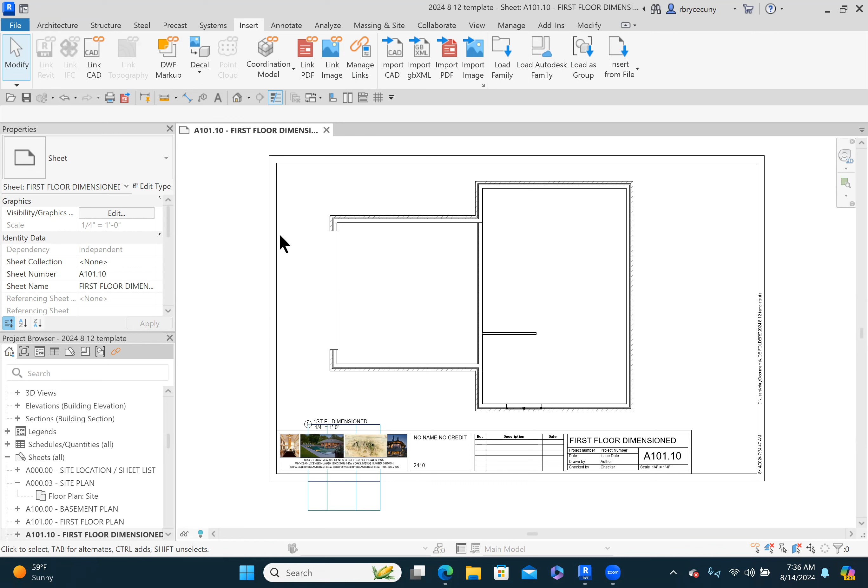We need to modify this floor plan so that it satisfies your design of a house. This is basically what I start with when I get a new project. I have many things already laid out, which makes Revit really simple for me, and it will be simple for you too.

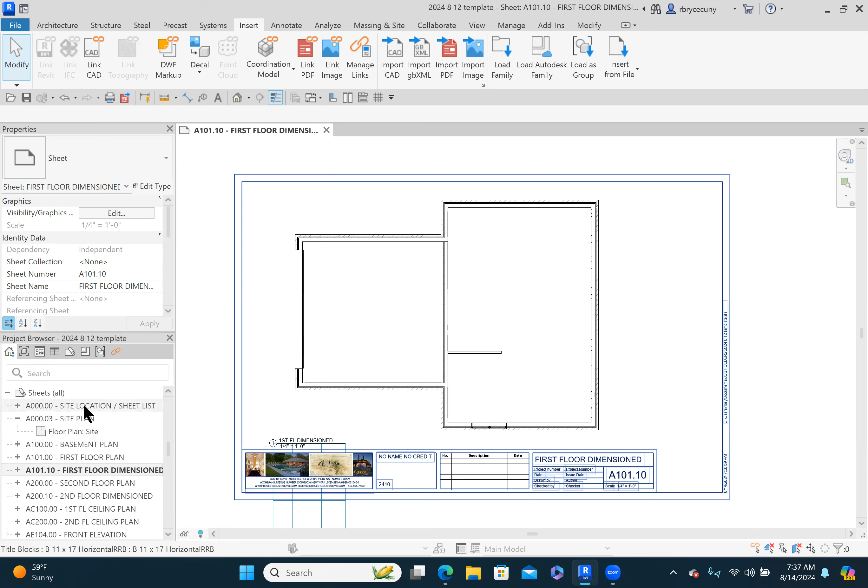So if we take a look, we scroll in the project browser. If you scroll down to your sheets, which are already pre-made for you, we start out with a site location list. I need you to go to Google Maps or someplace and find a location, an image of a location, and just click on this arrow and move that arrow to where you want the site to be.

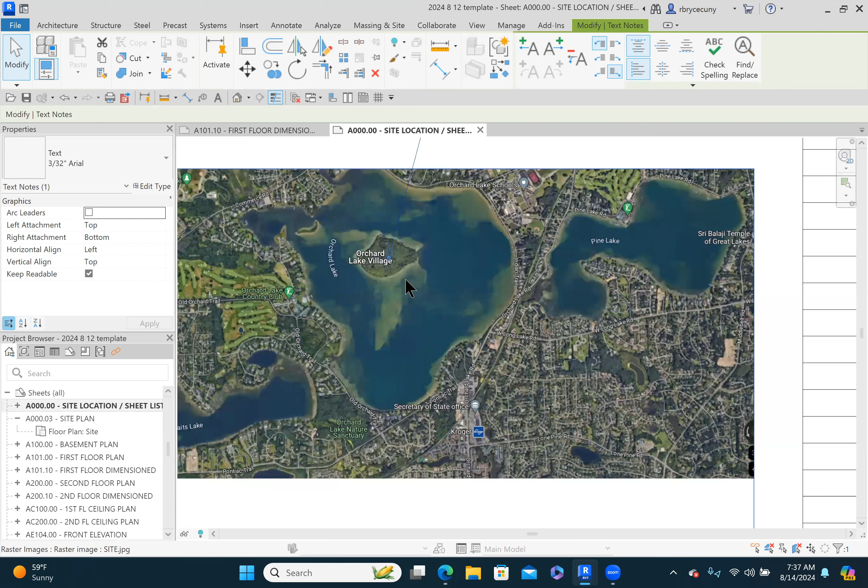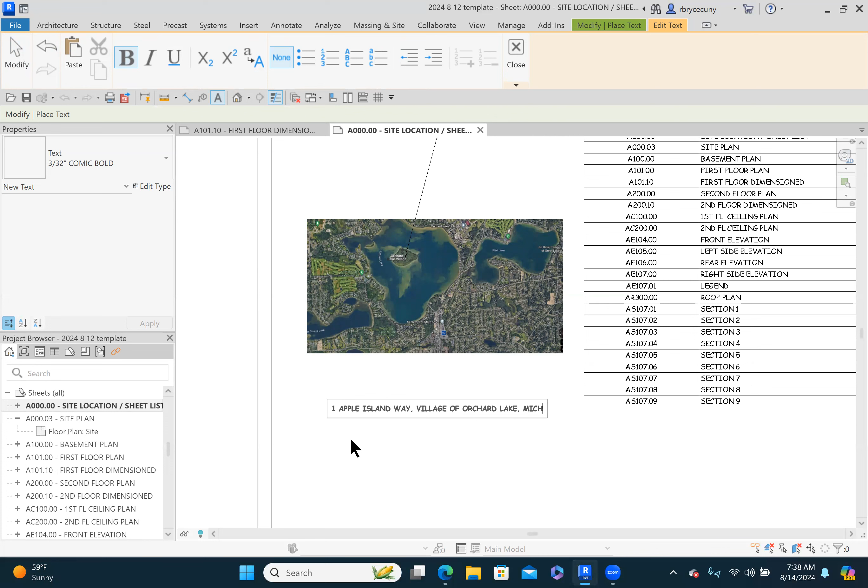I picked Apple Island, which is in my neighborhood. Down at the bottom we'll click the text icon and say, let's make some text. I was just checking to see if it's caps, and it is. So we'll call it One Apple Island Way. I believe that is in Orchard Lake Village, Michigan. You can make anything up you want.

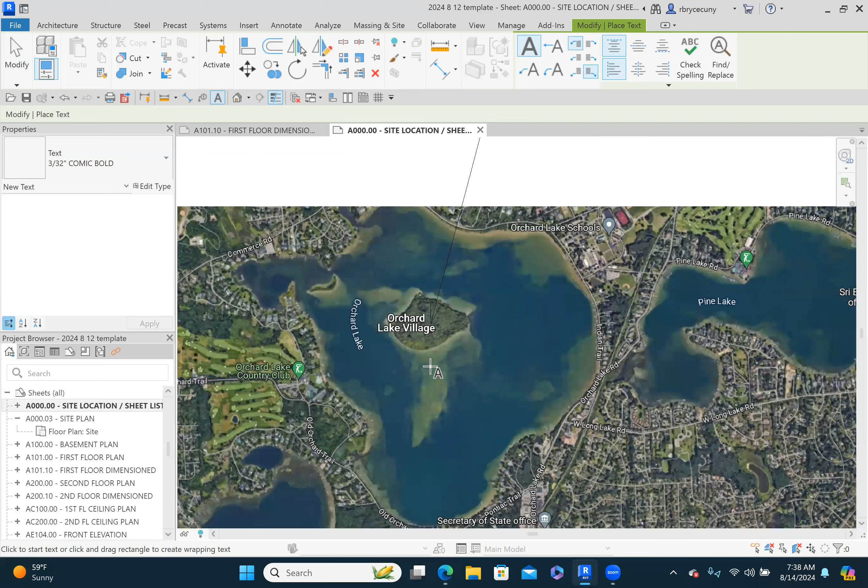This is private—well, no one lives on Apple Island. It couldn't get to it to begin with. But anyway, that's regardless, that has nothing to do with the class.

But pick a site, doesn't matter where you want this particular house to be located, because we want to locate it when we share our drawings. Typically, these drawings are going to be used for construction. We want the people to know where this particular house is to be built.

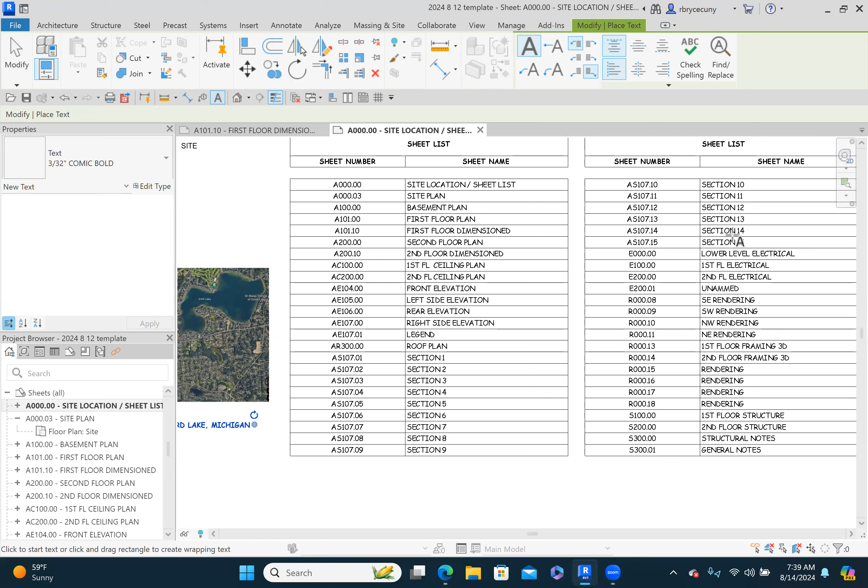And then also, if you look, you also have a table of contents. It's pre-built, and there are sheets for all of these items. But let's say when we actually do our project, we don't have 15 sections, we only have 14 sections. So we go down to section 15, click on it, and we'd say does not appear in sheet, and uncheck that.

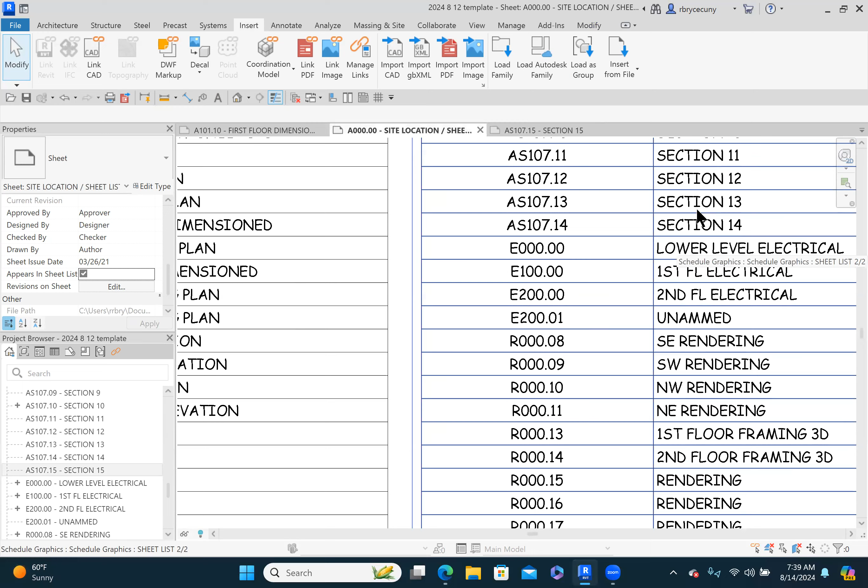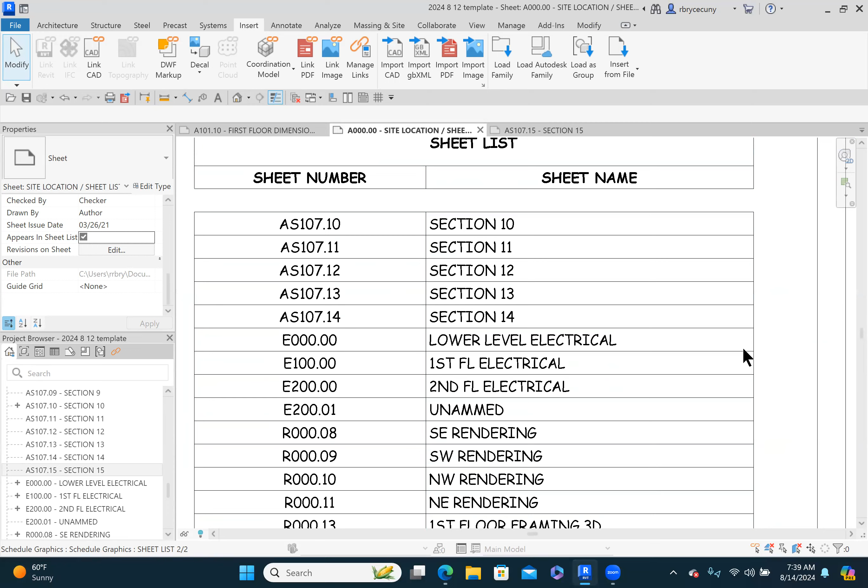Now if we go back to the sheet list, we'll see that it stops at 14, it doesn't go to 15. But for the purpose of this class, when I say it does apply, look—it added it back in there. Did it? Wait a minute, what happened here? Oh, because I'm on sheet 15, it's active, and I want it to appear in the sheet list, and there we go. Go back to the sheet list, and now it should be there.

Yeah, it is. So when you roll up your sleeves and start working in this class, you don't know how many sections you're going to need, and when I'm working on a project, I don't either. So I start out with 15 sheets that I have dedicated for the sections. As I populate those sections, when I'm finished with the project, I'll say, well, there is no section 15, 14, and 13, and I'll go and uncheck that so it does not appear in the sheet, which is in the property section of your navigation tools here.

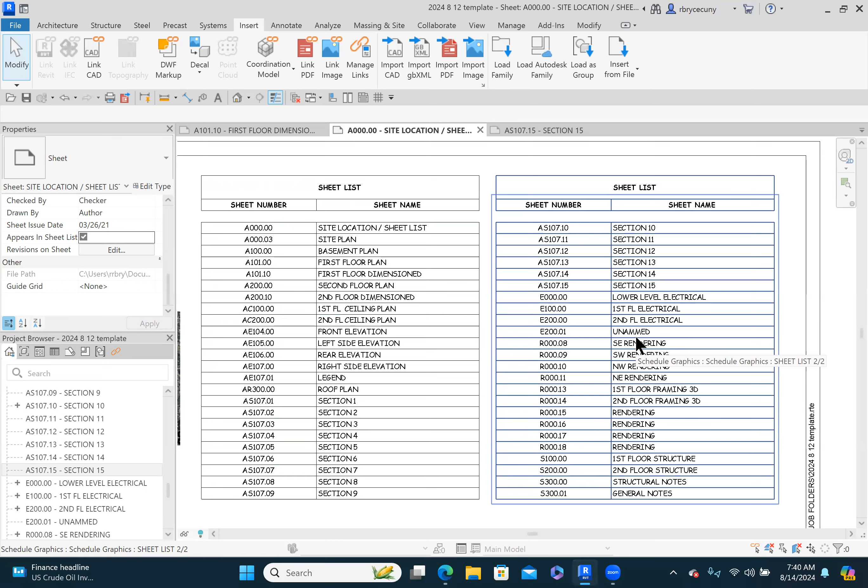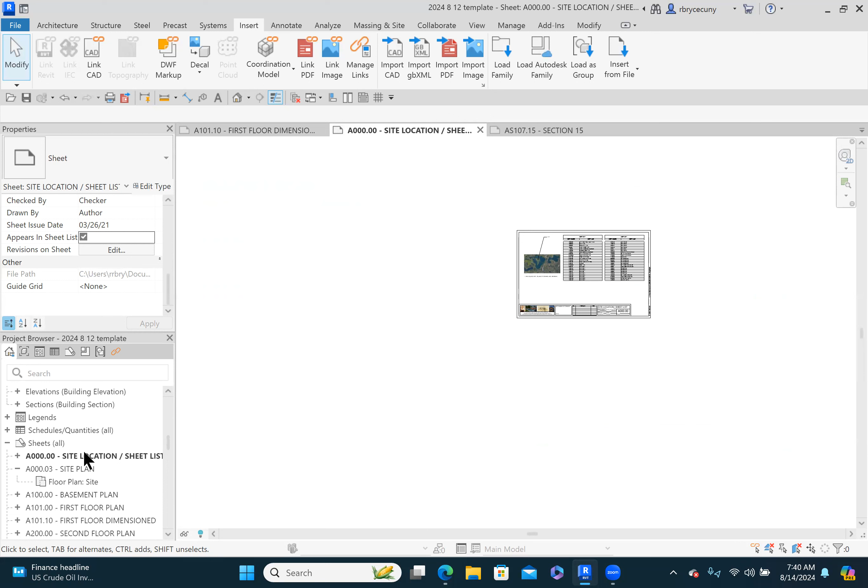Okay, so we don't want this—15, we would uncheck it. Again, you don't know at the beginning of the project how many sections you need to create for your project. So if we keep scrolling down in the sheets area, we looked at the site location.

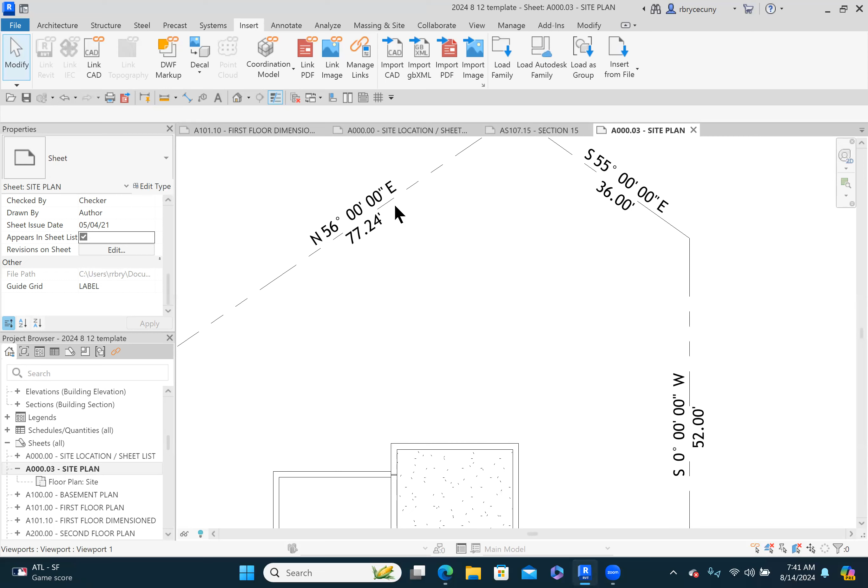Then we have to have a site plan, which I will also share with you how it is created. Each piece of property that we're going to put a project on—whether it's a school, an auditorium, a stadium, a church, a synagogue, some sort of a temple, a house—it's going to be located on a piece of property. That piece of property will be defined by the angle of the property line and the length of it. So this is telling me the angle of the property line, and this is the length. We'll work on that later on in the class.

We're just going through the sheets. Now you already start out here—I've given you a basement plan, and it's already loaded on a sheet. Now as you make this basement bigger to satisfy your design, we may have to modify it as far as its presentation.

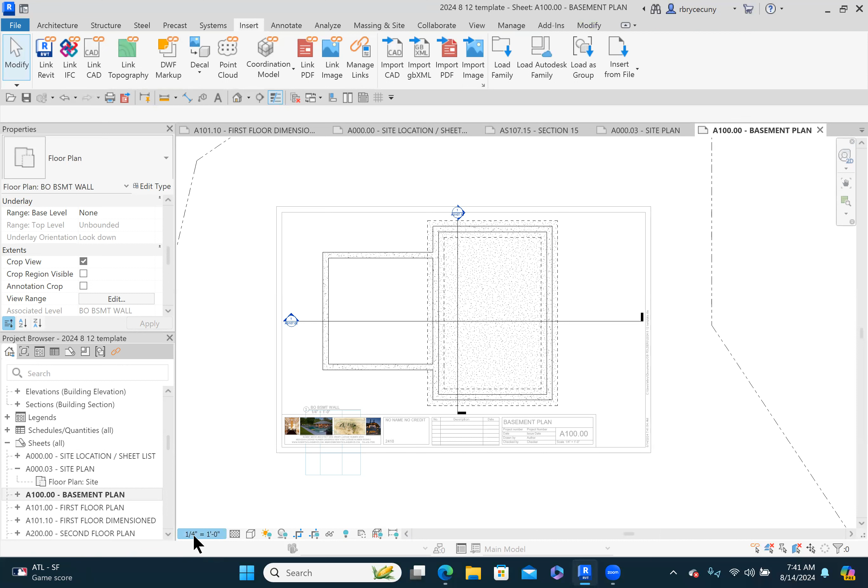So if this basement got larger, I would say activate the view—I right-clicked with my mouse, activate the view—and then I can change the scale from maybe a quarter inch. Right now it's a small house, it'll fit, but maybe I want it to be a little bit bigger house, so I might need to make the scale a little bit smaller. Now I can have a larger house if my house ended up being that big.

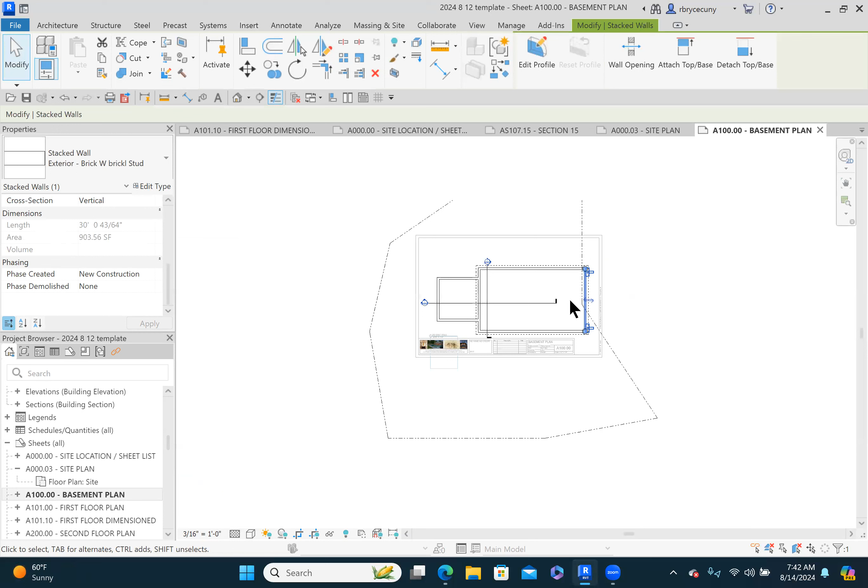It wouldn't have fit at this particular scale, which is, what is it now? 3/16. So let's go back and just look at if I made the scale a little bit bigger to 1/4, see how it doesn't fit on the sheet.

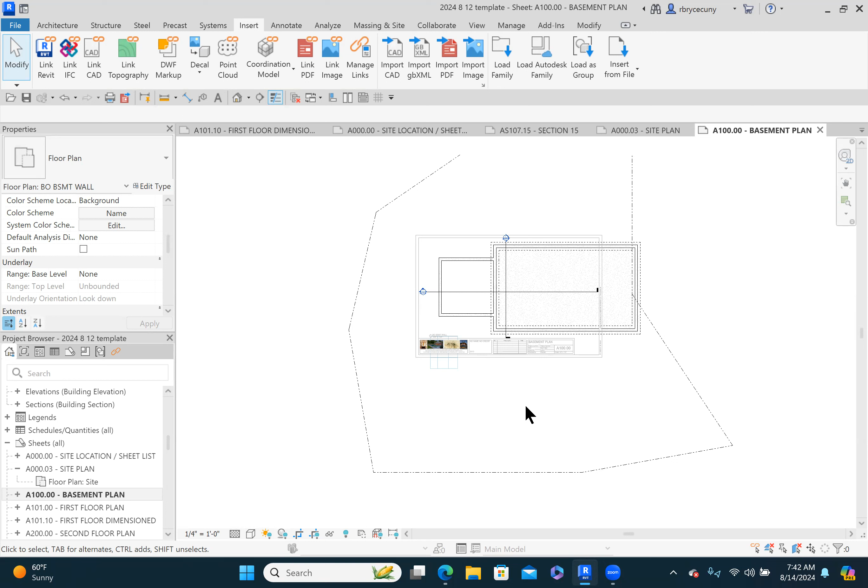Your project will be printed by the sheets, and if work doesn't fit on the sheet, I will only see what's on the sheet, and therefore I can't give credit for work done if it isn't displayed on the sheets. And if you think about that in real projects, if the people trying to construct your ideas that you've put on the paper can't see that, then they don't know what you want. They can't read our mind.

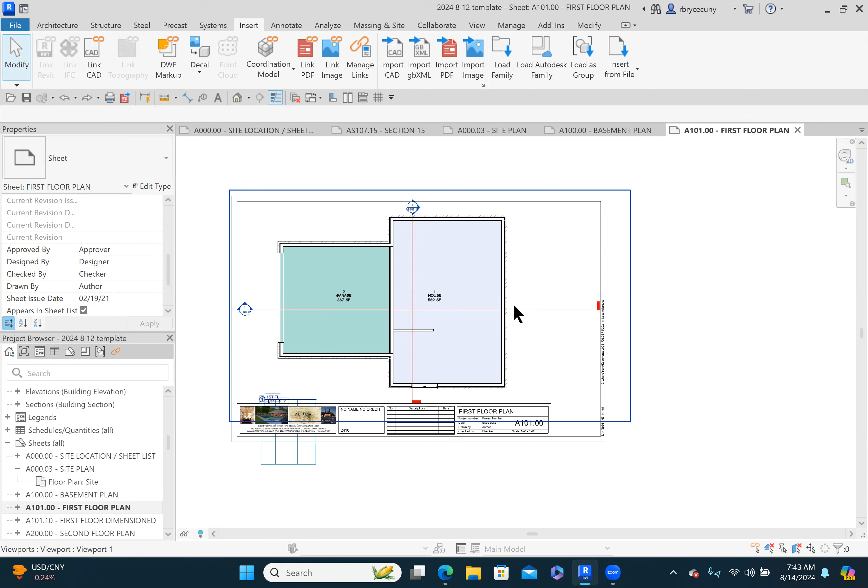So if we take a look now at the first floor plan, look what happened. The beauty of Revit is when I modified that floor plan, it actually changed the basement, the first floor, and the second floor automatically. I'm going to activate the view, click on this section and say go to view. And these are actually stacked walls, which means they are different wall components stacked together to create a wall.

So when I move this wall, let's do that. I'll go up to the ribbon. I'm in the modify tab of the ribbon. I go over to the move icon, which if you hover over with your mouse, Revit will tell you what it is. But anyway, let's grab this guy. I'll click on the object, say I want to move it, and let's move it to there.

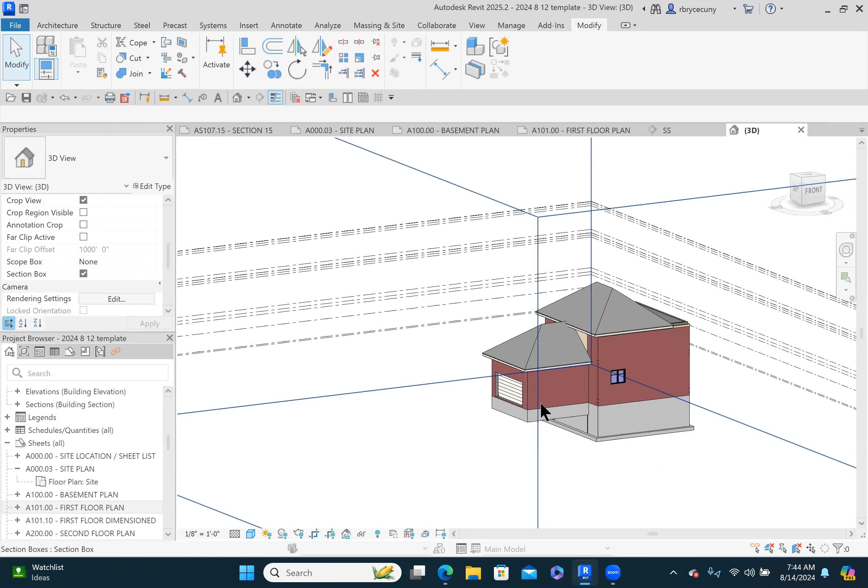Notice that it moved all of that wall, including the footings. It didn't move the roof because the roof isn't attached to the wall. But it did move everything on the basement, the first floor, and the second floor. If we take a look at that in 3D right now, just click on this little button here, and I'll spin it around, you can see that it actually moved that wall out, all of the components of that wall.

So I can take that wall, and I'm clicking the arrow key on my keyboard, and look what happens in Revit. It's moving that wall and its connections to the other two walls that it's connected to.

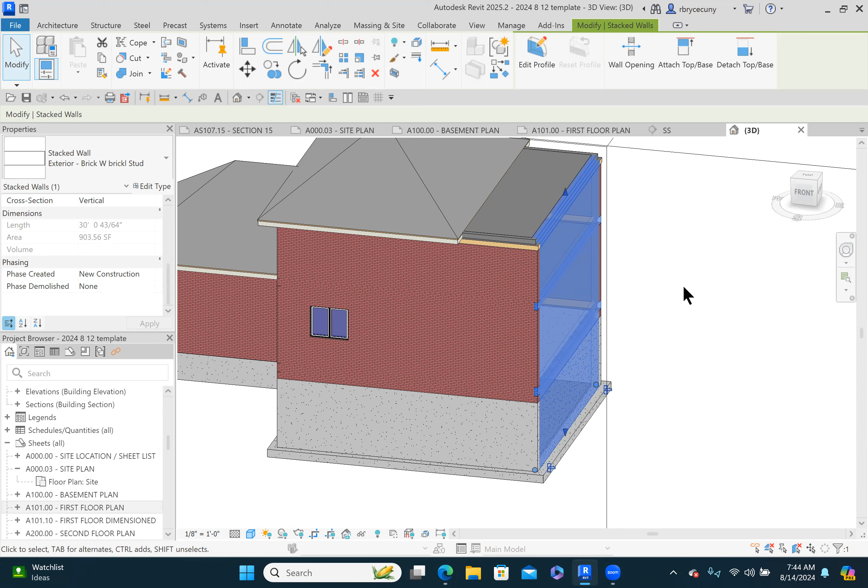So there's a lot of features that I think make Revit a much more useful tool than AutoCAD, which is a prerequisite for this course. So you've taken AutoCAD, now you can see if you were going to do this in AutoCAD, you'd have to move this wall, this wall, and this wall individually. But in Revit, it moves it automatically.

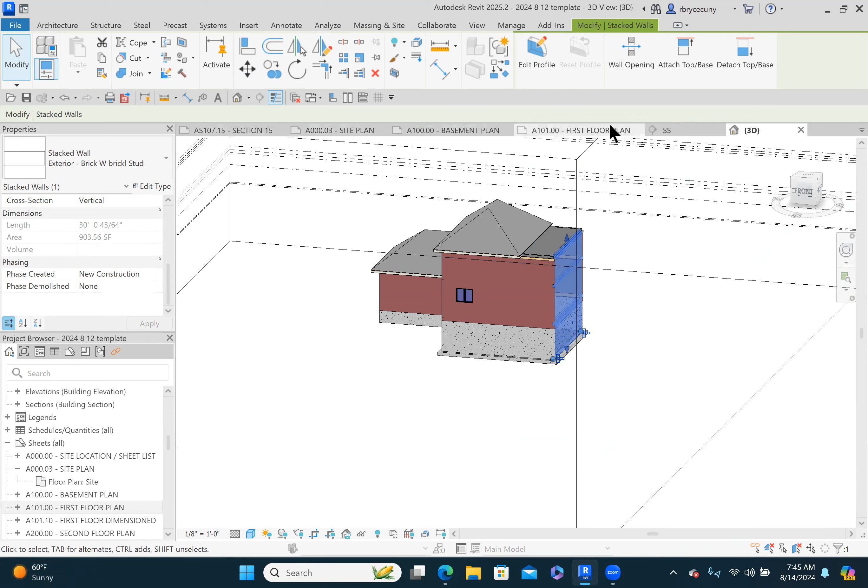So I'm putting up a lot of tabs up here. To close those tabs, just click on the X. We're back to that section. I can leave it where it is now. We're just going through the sheets.

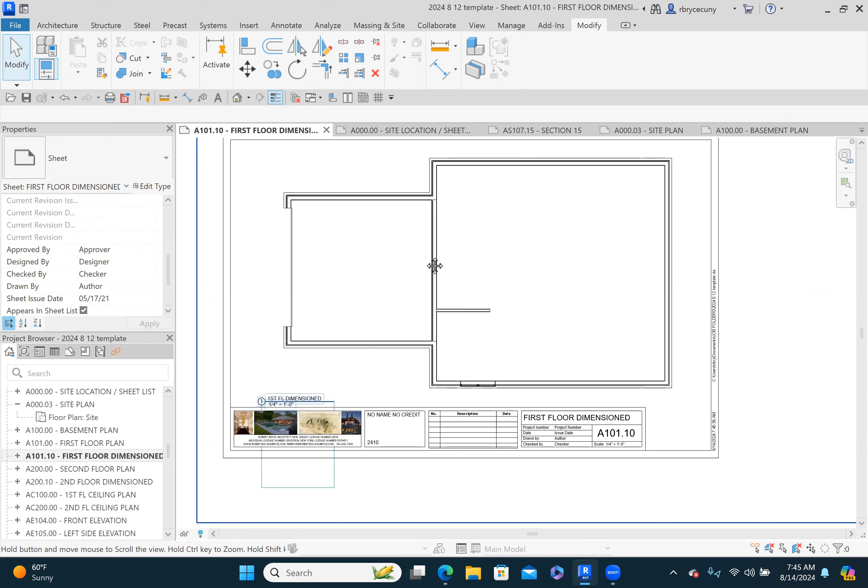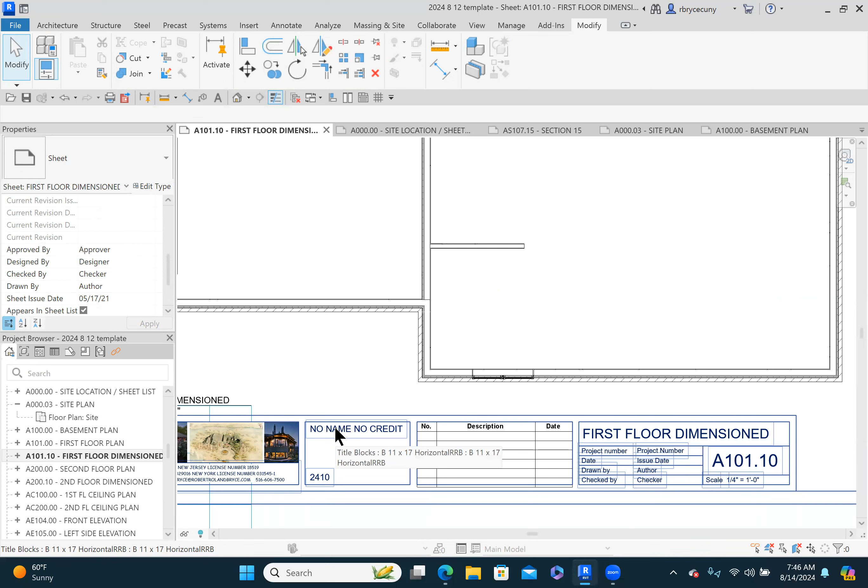So we have the first floor dimensioned, and that's one of the requirements in this class. Today we're going to do a couple of things, assuming you're watching this after the class. The first thing I want to tell you is we're going to submit drawings every week. You get 2 points for just submitting, whether you've done any work or not. That adds up to quite a bit of points for your total score. But if you don't have your name on that sheet, you're not going to receive credit for your submission. So the first thing we want to do is double click on that with your mouse and just put your name.

Now, what happened to the other sheets? It changed, Revit changed that on every sheet. So when you just click on one and fix it, you'll find that it changes it on every sheet, so you don't have to go through sheet by sheet.

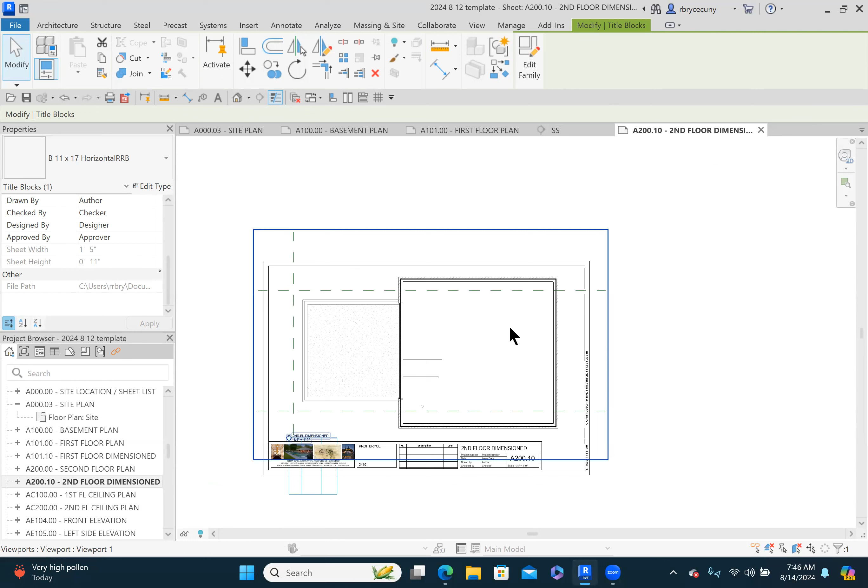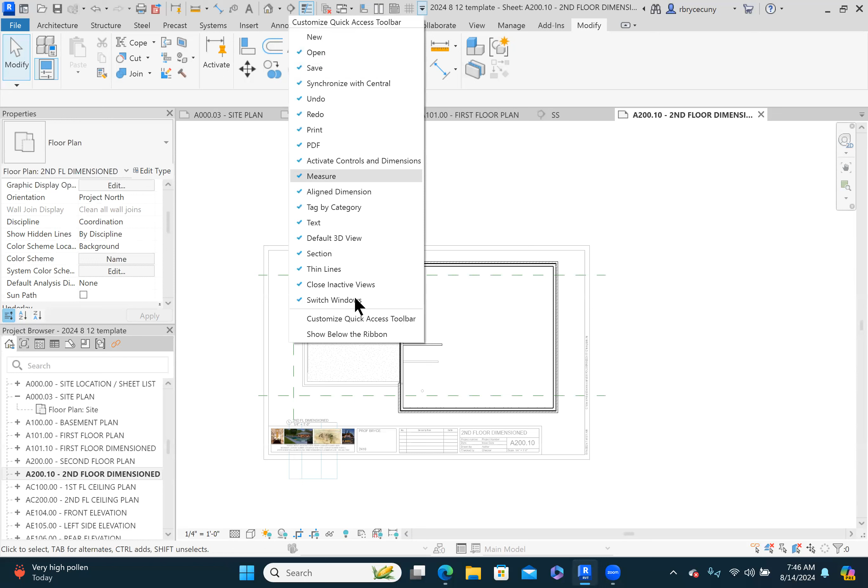But what is important here in the class is that I'm going to right-click on top of the drawing, activate the view, and go up to the quick access toolbar, which when you start may be at the top of the ribbon. If I click that, it moves it up to the top, but there's this little down arrow, click on that, show below the ribbon, because I like it that way, this is my preference. So if you want it to stay at the top, that's fine. You're working on this template, so it's probably going to come to you with the ribbon down below.

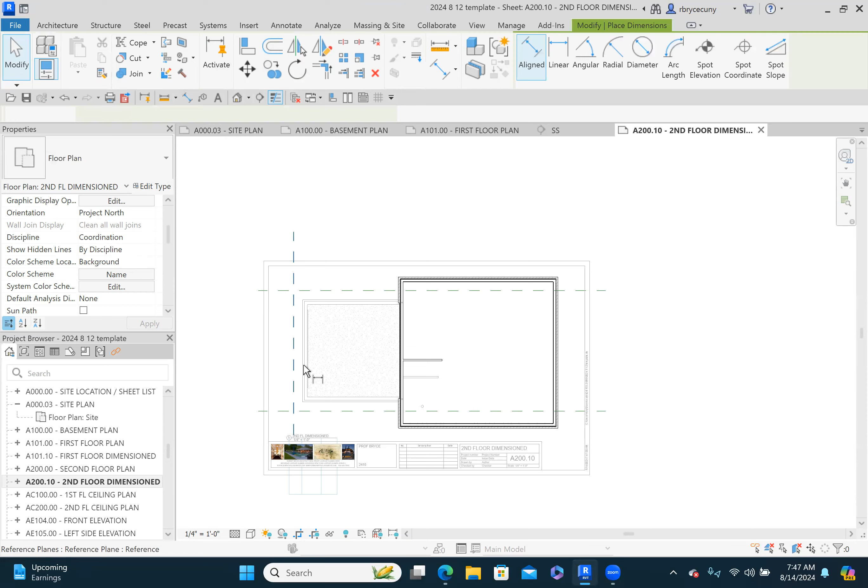Anyway, I want to put a dimension in. You can see this icon here. All I have to do is click on it and then show Revit where I want it to dimension to. I've selected the places I want it dimensioned to, and now I just have to click where there's no object, because now I'm trying to place it.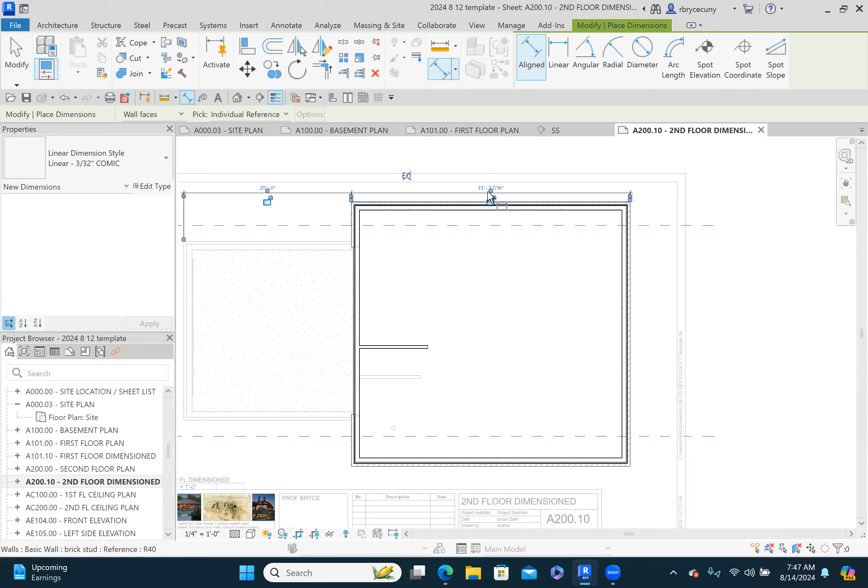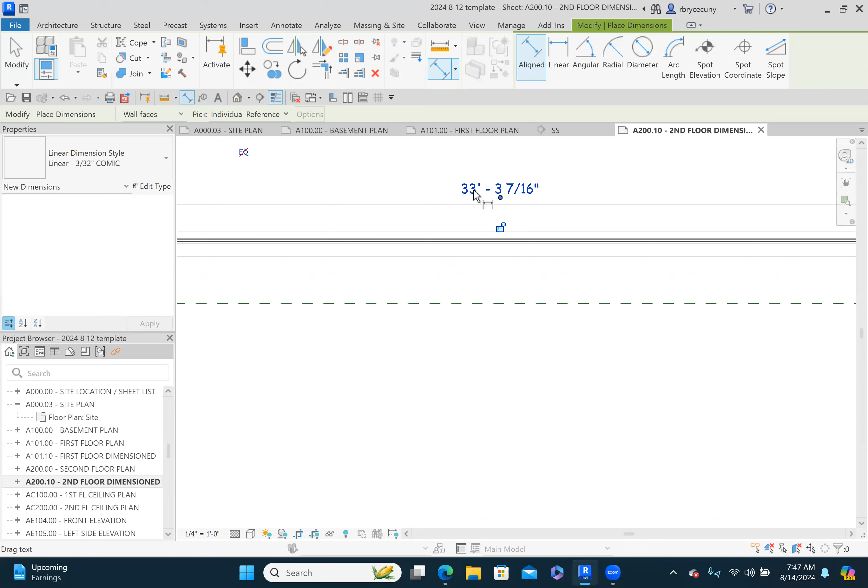So I don't want to click on an object, because if I clicked on an object, Revit would think I'm dimensioning to that object. So I'll just click right here to place the dimension. As you can see, this is a strange dimension, and I don't want it to be that. The requirements in the class are that dimensions are 2-inch increments. So this dimension could be any foot distance, but then this would have to be 2, 4, 6, 8, 10, or 0 inches. It has to be an even number. So how do we do that?

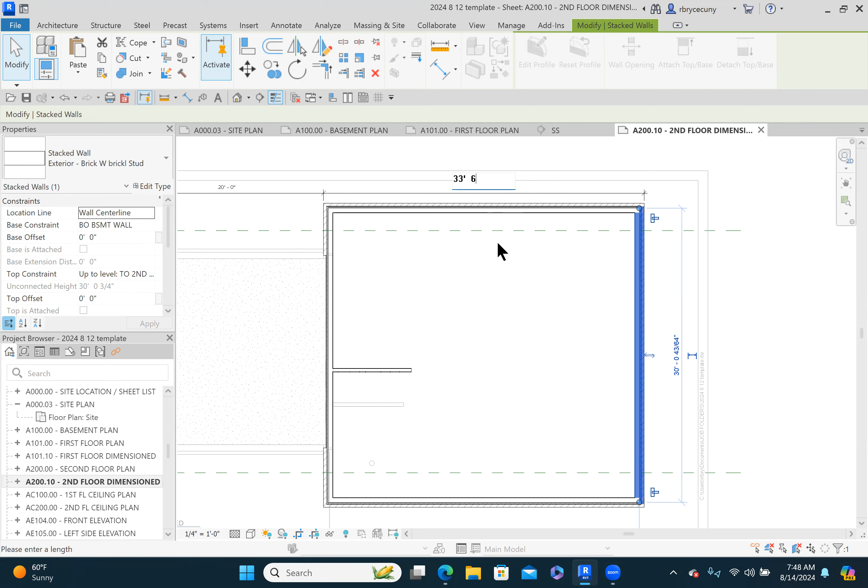Well, let's hit escape a couple of times. Click on the object you want to move. We want to click on this dimension and tell it what we want this dimension to be, and Revit will change that dimension by moving the object you have highlighted. Now, it's not active, so I'm going to go up to the ribbon and say activate. Now when I click on this dimension, I'm going to say 6 inches, hit enter, and watch what happens. It's going to move this wall to satisfy that dimension of 33 foot 6. If I wanted it to be 33 foot 0, I would just say 0. That's an acceptable incremental dimension, and it moved that wall to satisfy that dimension.

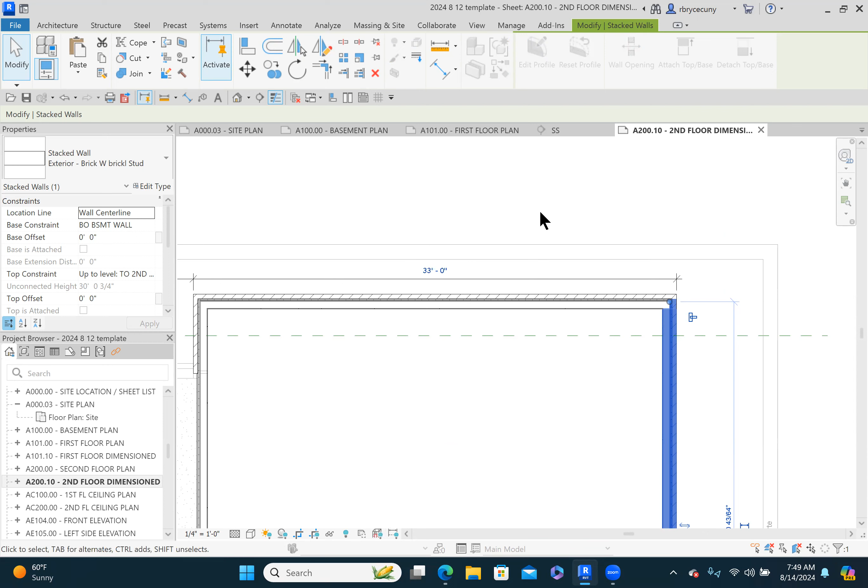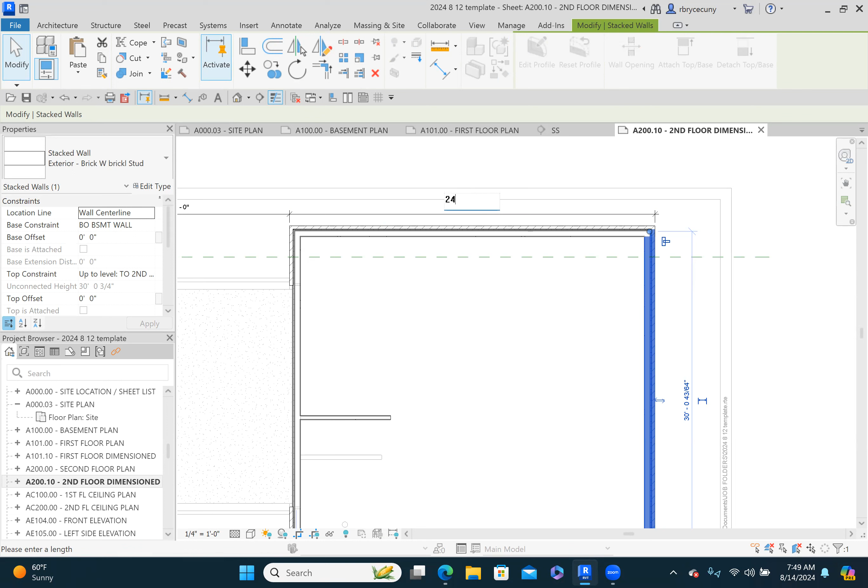So in order to change your dimensions, a lot of people will think you just click on this dimension and that will allow the dimension to change. But if we just click on this dimension, Revit doesn't know: do I want it to move this object to satisfy the new dimension, or do I want it to move that object? So the first thing we do is click on the object that we want Revit to move, and then we change the dimension. So maybe I wanted it to be 24 feet. Watch what happens. It makes it 24 feet by moving the highlighted object, because Revit wouldn't know otherwise.

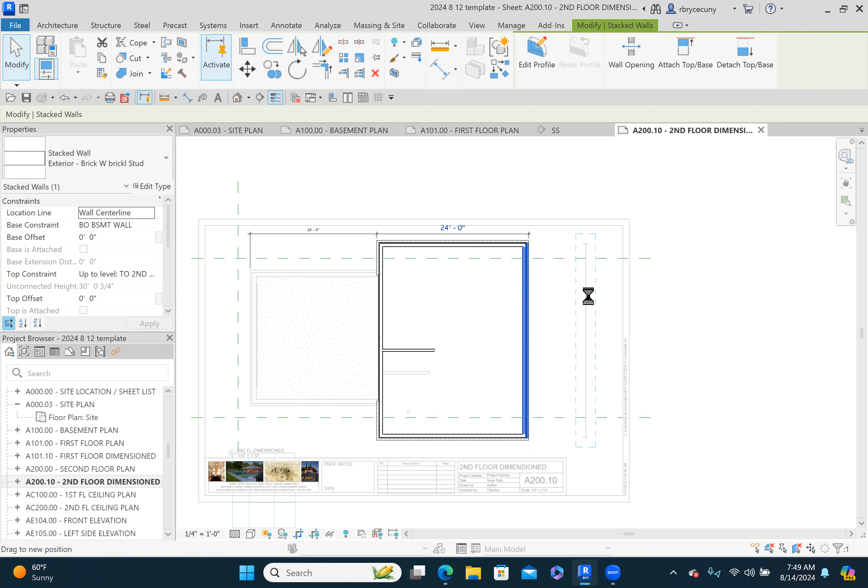So as we start to lay out the inside of the house, we'll find that, well, wait a minute, I don't have enough house, I need more space. So you can grab this guy and move it over to give you more space inside of the house. But remember that you need to change this to an even dimension at some point in time after you've put the pieces inside of your house.

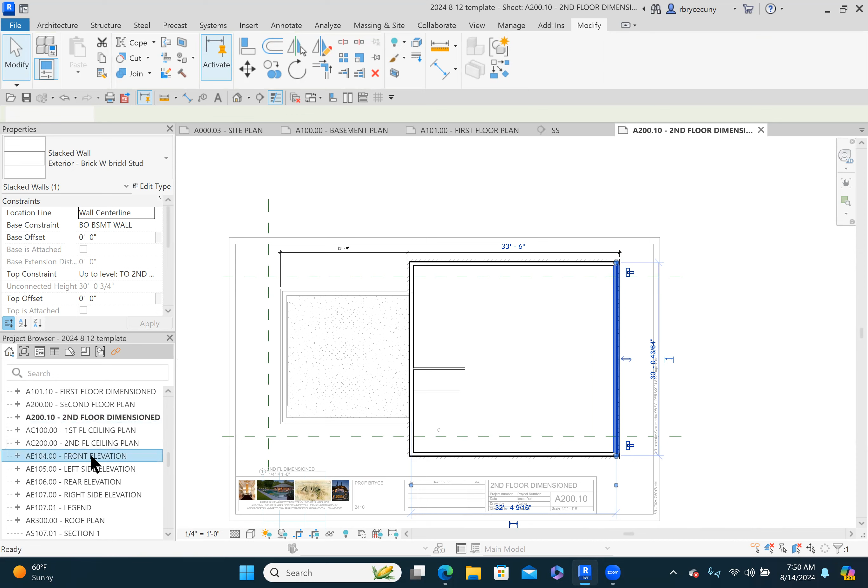Midterm will be making stacked walls. So I'm making stacked walls for you now, providing pre-created stacked walls so that you can jump right in, roll your sleeves up, and start designing your house. Later on, we'll work on how you actually make stacked walls, and that will be the midterm. I'll give you some stacked walls to make, and you'll have 3 hours and 20 minutes to make them.

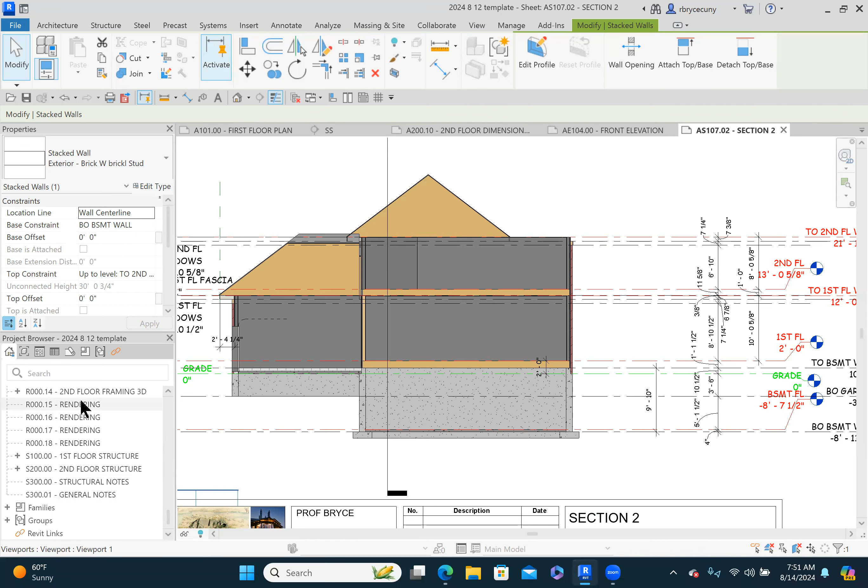So we have all kinds of sections. And then Revit makes nice renderings for us. But I didn't put one in here yet, so I haven't made one. It also automatically has some pre-made renderings that aren't really photorealistic - these are just more basic.

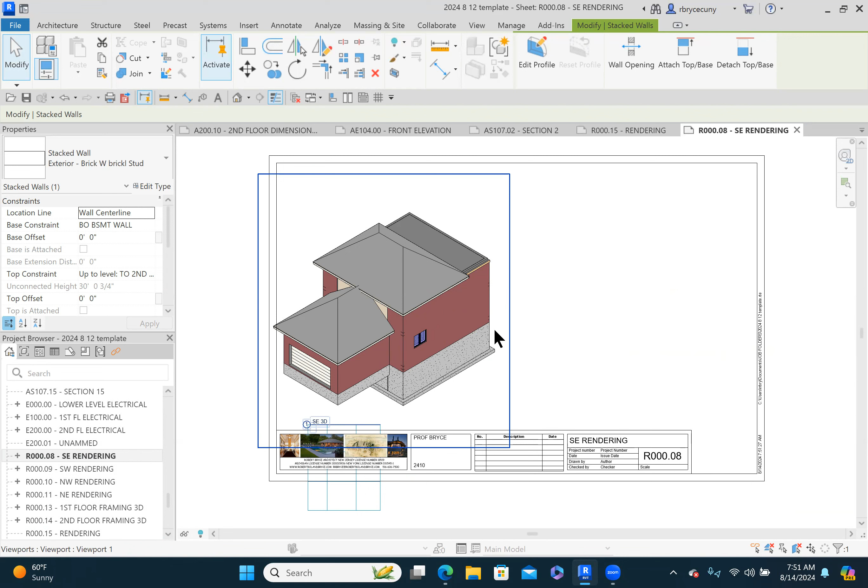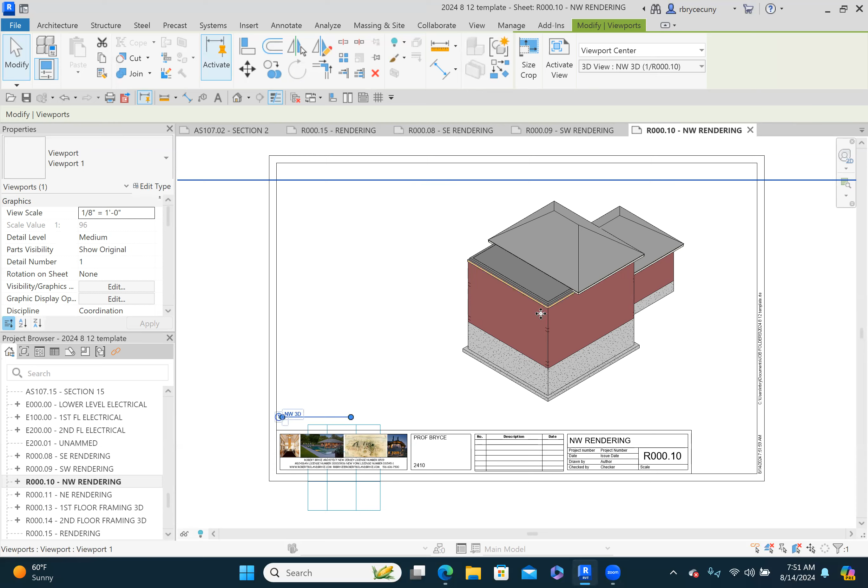But as you change the design of your house, these renderings will automatically change, and you might need to relocate them on the page by simply clicking on it. Then I find the easiest way to move them is to nudge them with the arrow keys if I want it to go up or down. As you modify your house, you're certainly going to have to do that as well.

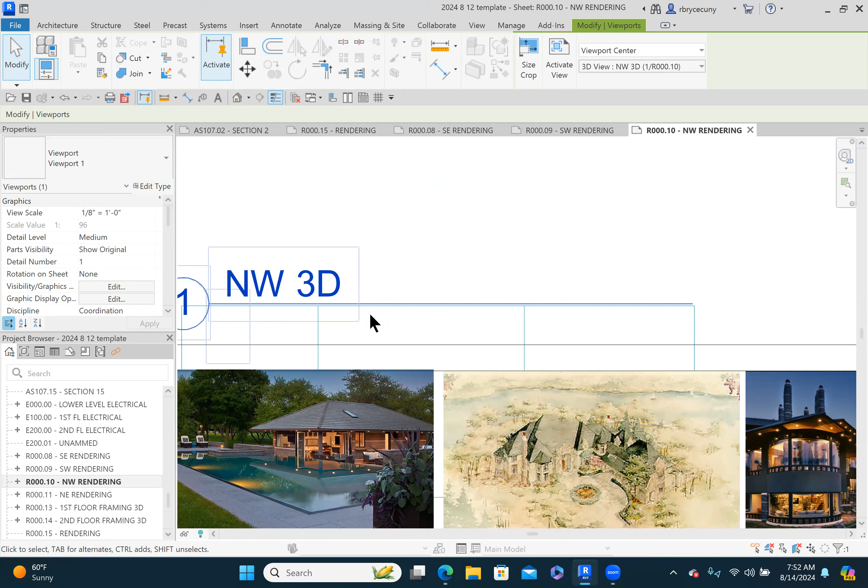We can talk about the grid guides, but I moved the house, so now I have to move the label. I've got a grid guide in there for the label, so I want that label - using the arrow keys again on the keyboard - to nudge it down close to that level. But we'll talk about that later. Right now, ZE on the keyboard zooms extents.

Here's your, or my, house layout, and we'll improve our architectural design over the course of the class.

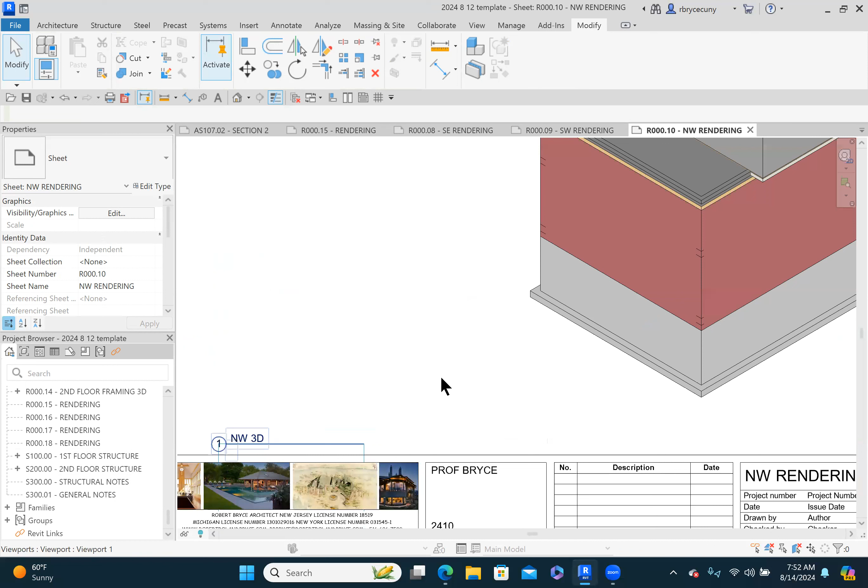But what I wanted to point out today is to make sure that you start out by changing your name down here to whatever your name is, so you'll get credit for it. And then we want to be able to print this and submit it on Brightspace.

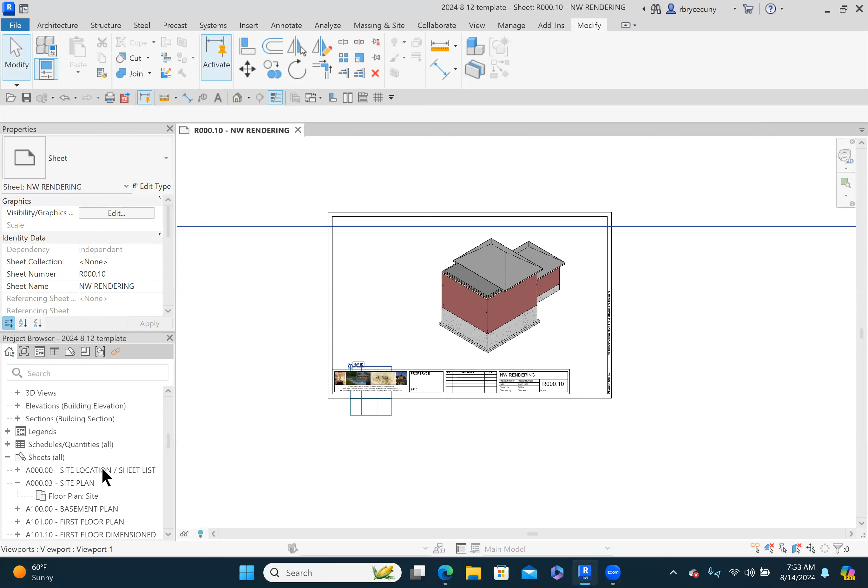So to print your whole sheet set, let's get rid of all of these tabs. There's a little red X in your quick access toolbar which says close the inactive. So, boom, all of those tabs were closed. This is the active view, so it stayed active, but we want to go over to the site location sheet list.

Those are the sheets that I want to print, and those are the sheets that you'll want to print. Whether you've changed anything or there is information on there or not is irrelevant at this point. I want to make sure that you print every single sheet.

So we'll go over to the file button and say print. What are we going to print? Well, we're going to print a PDF, so we need to pick the PDF printer. Let's see what's available here.

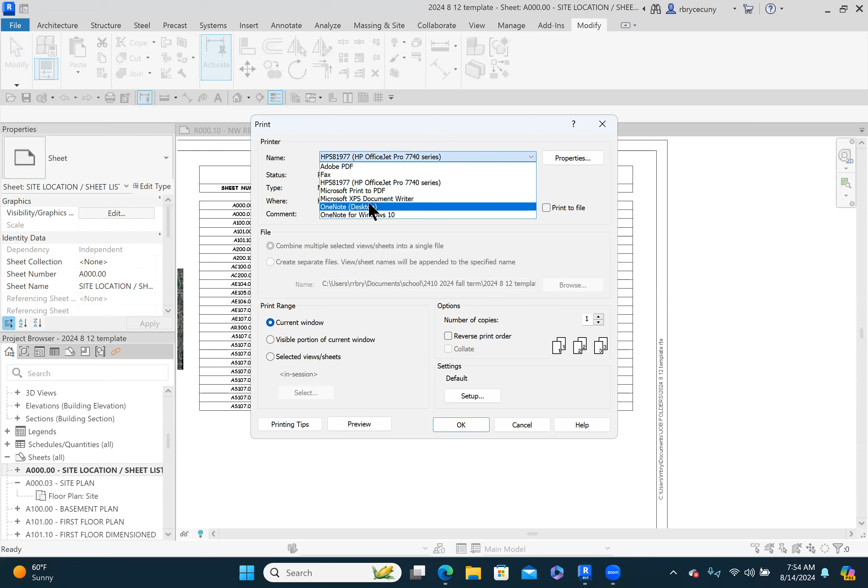I like Microsoft Print to PDF. If you have Adobe, I find that Adobe takes a lot longer to print, so I like to use Microsoft Print to PDF. Then we have to set it up.

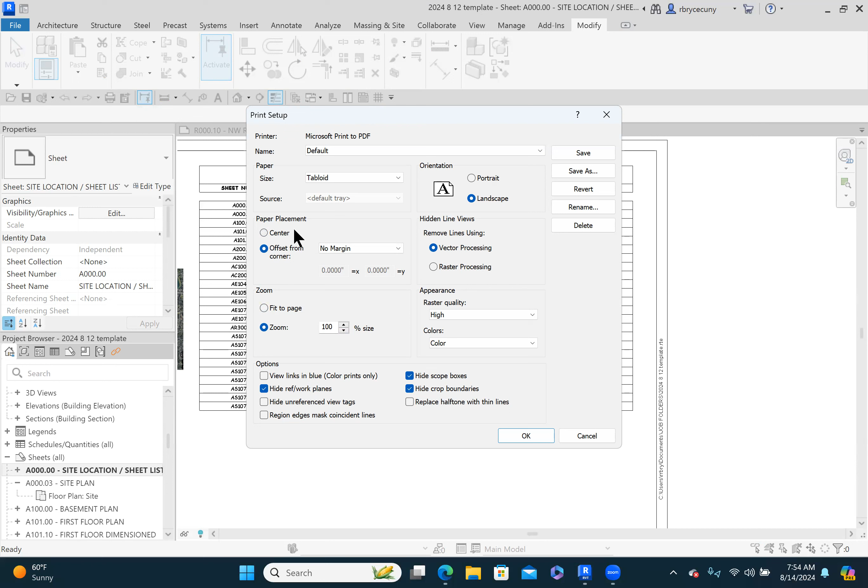What paper size are we going to use? Well, let's use tabloid because that's 11 by 17, and we want to zoom 100%. So it will move down from center of the drawing to offset from the corner with no margins, because we don't want any margins.

And then we need to select the drawings that we want to print. Here, I'm going to use the display filter. First of all, we don't want any 2D views, so I'll uncheck that. We don't want any 3D views, so I'll uncheck that. Now all we want are the sheets.

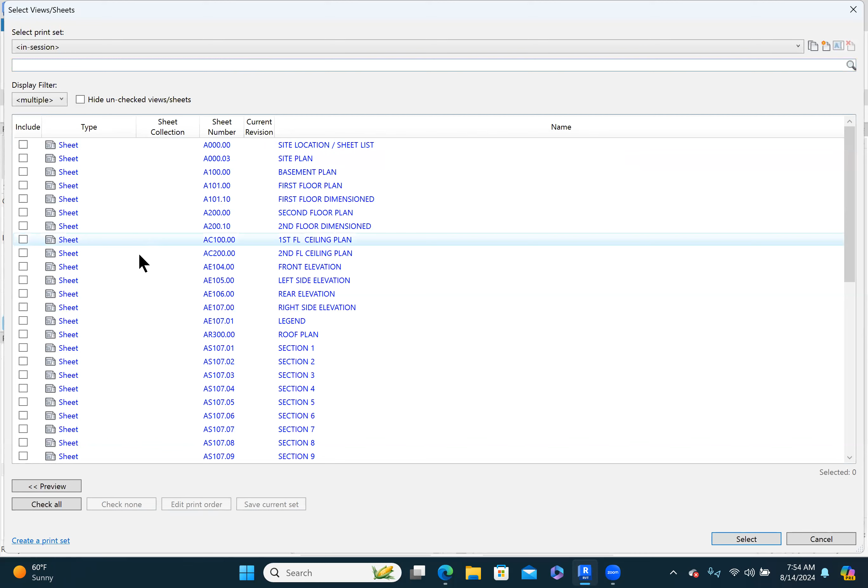Now we'll just say check all, make it very easy for us, and say select. And so now if we say okay, Revit...

This is a nice warning here. It says you have chosen to print 48 views as separate files. You don't want to do that as separate files. You want all of them included in one file. So I'm going to say no and come up here and say combine multiple selected view sheets into a single file, and say okay.

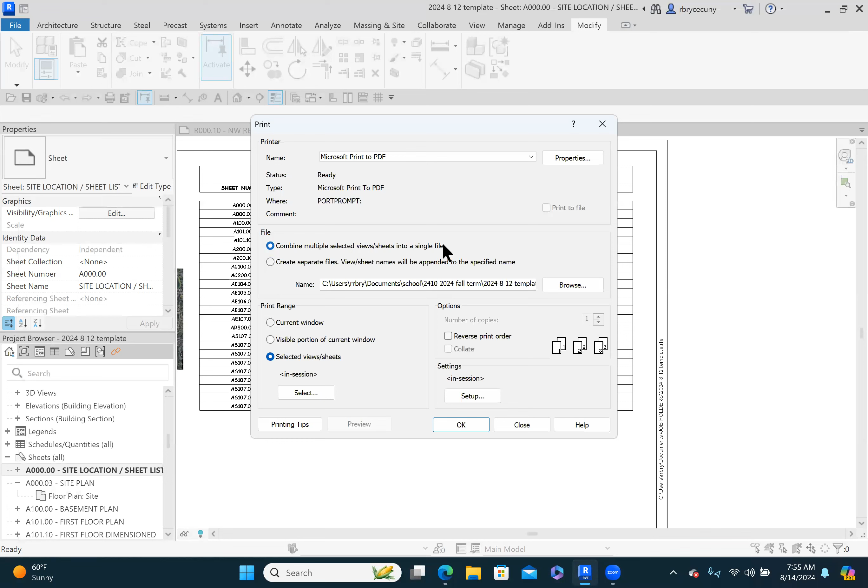Now what's going to happen is Revit's going to say, well, where do you want them to be? Find a folder for it. And I'm making this on the 14th of August, so I'm going to say 8/14/2024. I'm going to write... put my name in front of it too.

Okay, so now I'm going to have a file. Revit's going to make a PDF file using Microsoft Print to PDF with this name in this folder. I'll just say save it. It'll take a few minutes or a little bit of time.

And then that will be your submission set for this week, for each week of the class. You want to submit these sheets every week, whether you came to class, whether you didn't come to class, whether you did any work or you didn't do any work. Give me a weekly submission and I will allocate 2 points towards your final score, which the numerical accumulation of all of your points adds up to a letter grade, which is applied based upon the amount of numerical scores that you receive throughout the class.

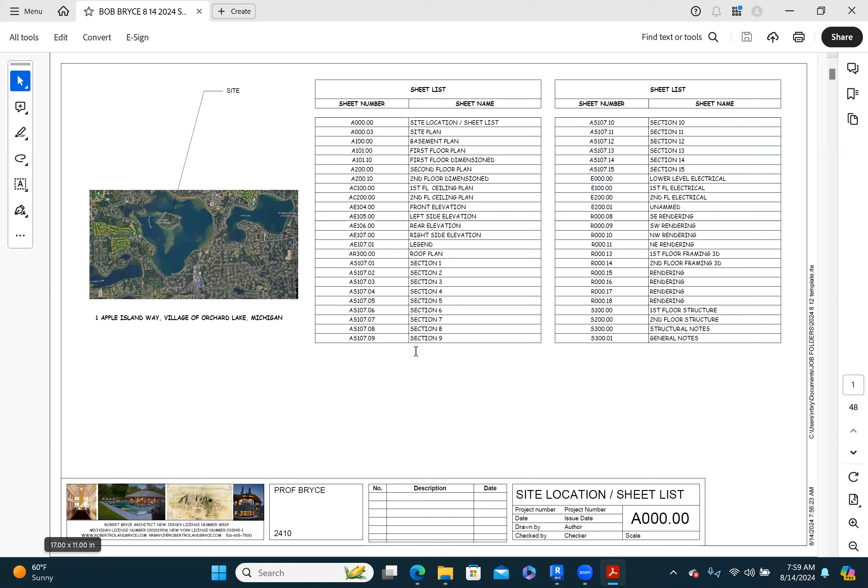And if I scroll down, you can see that it's made a nice PDF of all of the different sheets. And this is what I'm looking at. As we go through the class, you will improve and create more and more information on the sheets.

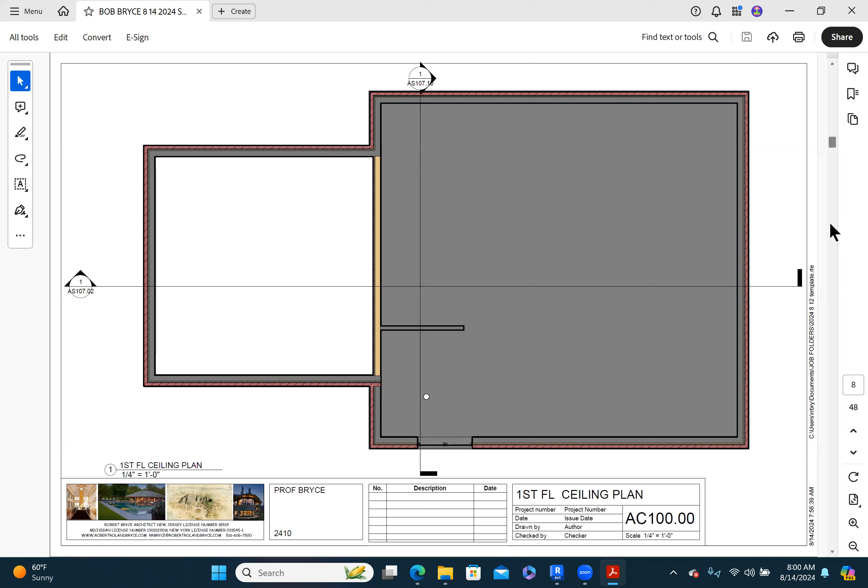So this is basically a lengthy video just to show you the two important things: one, you need to put your name on the sheets, and two, how to move the walls and modify them by simply dragging them and moving them, or clicking on them and adding a dimension that you want it to be. So all of the sheets are already set up.

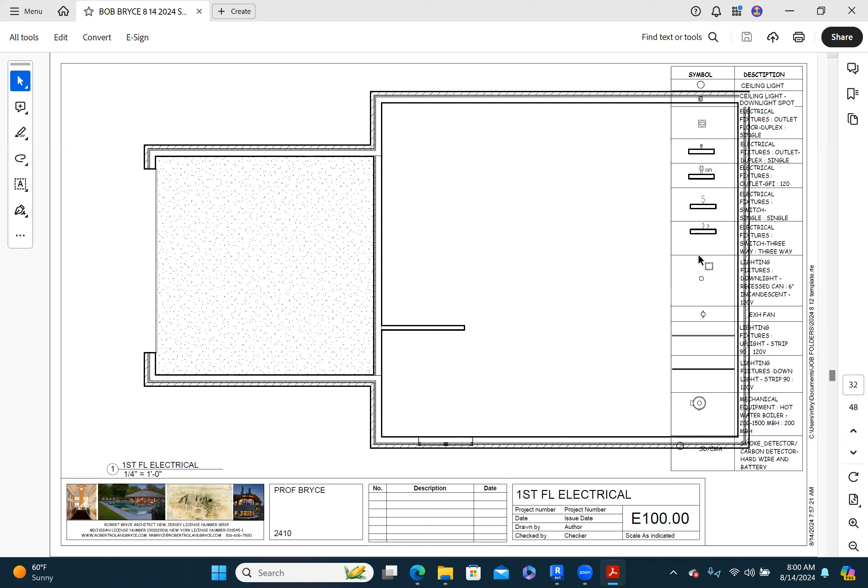And as we go through the project, we'll populate more sections on the sheets, and then this will be your submission. So I have a schedule or... forgot the name of it. Let's go back to Revit and we'll see, what do we call that in our schedule?

Legend. It's a legend. Okay, so I have a legend on the sheet already, which is conflicting with my design of my house now, so we'll have to modify that. And you'll have to modify that maybe too.

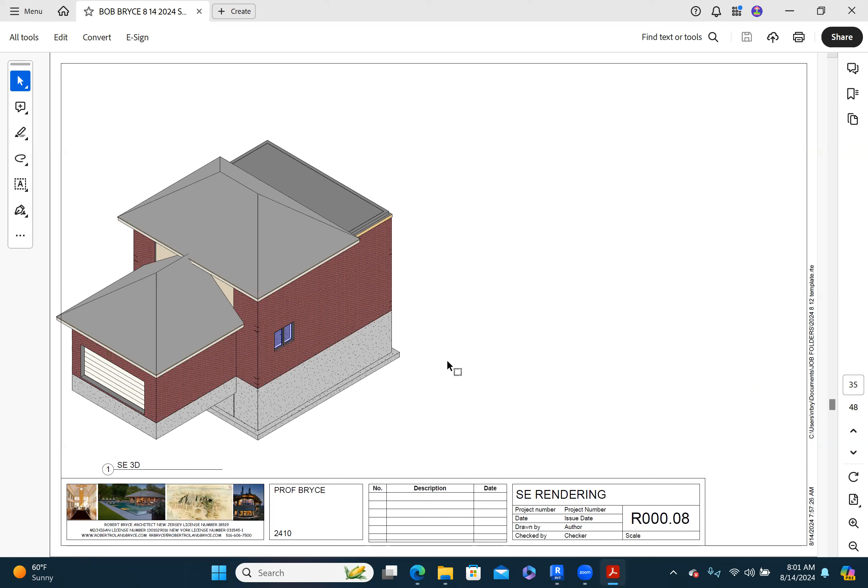All right, so these are the 3D views of what we did, already created. And as you make the changes, Revit will change them for you. And this is what you want to submit. So then we'll go over to Brightspace and submit it.

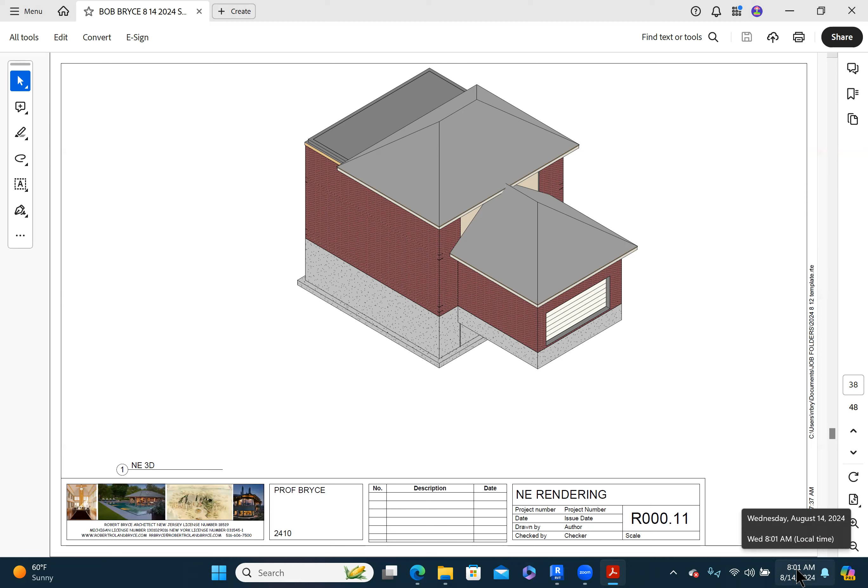And of course, all of the things that I am showing here, we will have gone over in class, because this video is being made before the class. I don't know which tense I should be speaking in, because you'll be watching it after the class, but I'm making it before the class. Anyway, this should help you start being able to submit your work and some of the important things, which of course are the name and how to dimension.

And use your template, which I've given you in Brightspace.